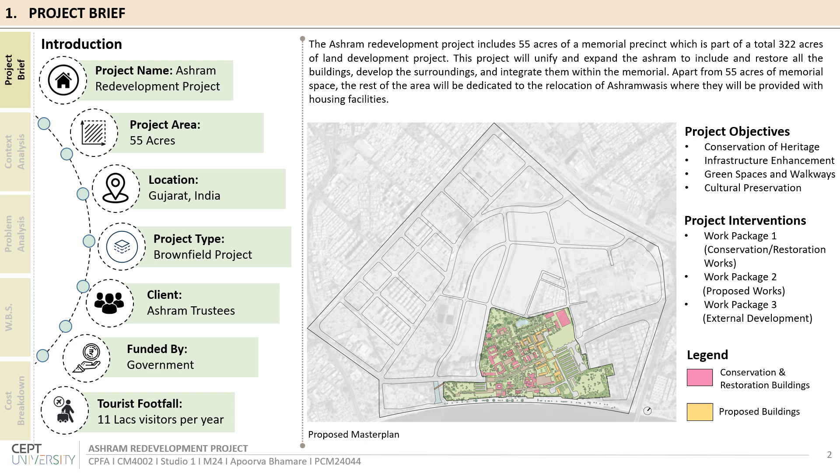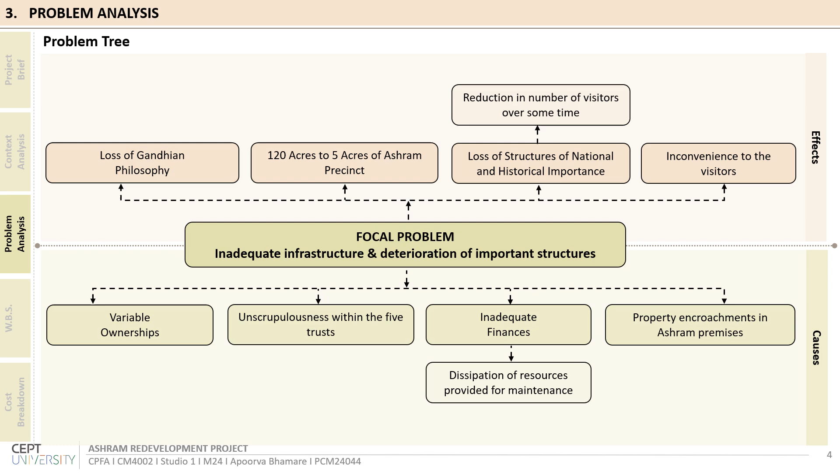Option analysis was done that included providing 4 options for the project. The first option was to keep the structures as they existed and include unidentified structures. The second option was to only conserve and restore the existing structures along with the unidentified buildings. The third option was to conserve, restore and amalgamate new buildings into the campus with the incorporation of new technological tools, campaigns and exhibits and the development of adjacent areas. The last option was to only enhance the surrounding infrastructure.

The third option was chosen for the project considering its need to accommodate new facilities in such a way that it shall not tamper with the existing buildings. It should amalgamate benefits such as the use of technology, campaigns and exhibitions which would add value to its design. Surrounding area development would also attract and accommodate more visitors to the campus.

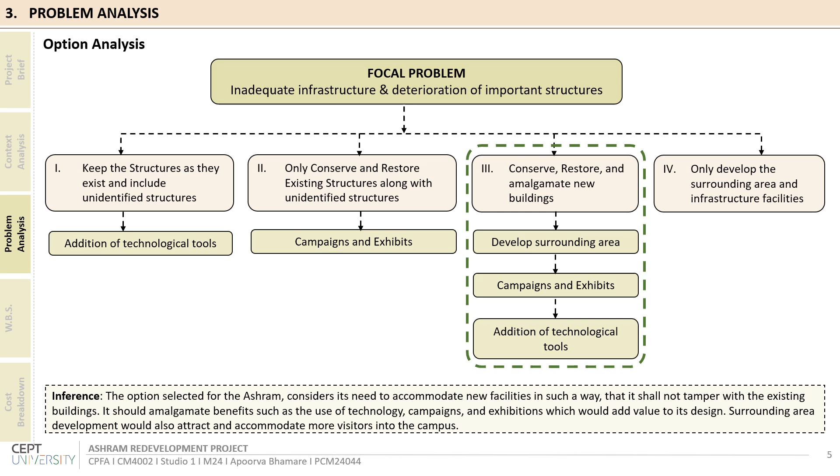A work breakdown structure was prepared considering the scope of work involved in the project, covering various stages of the project life cycle. These include the initiation phase, planning phase, design phase, procurement phase, construction phase, and operation and maintenance phase. The initiation phase includes the appointment of a project management consultant by the client. The planning phase involves a feasibility study, site investigations, documentation, and most importantly, project clearances.

The design phase will include the preparation of a master plan and concept design, tender preparations, landscape design, and appointment of a structural consultant, MEPF consultant, and exhibition curators. In the procurement phase, two contractors should be procured, namely a conservation and a restoration contractor having relevant and specialized experience and a principal civil contractor for the construction of new buildings along with external development works.

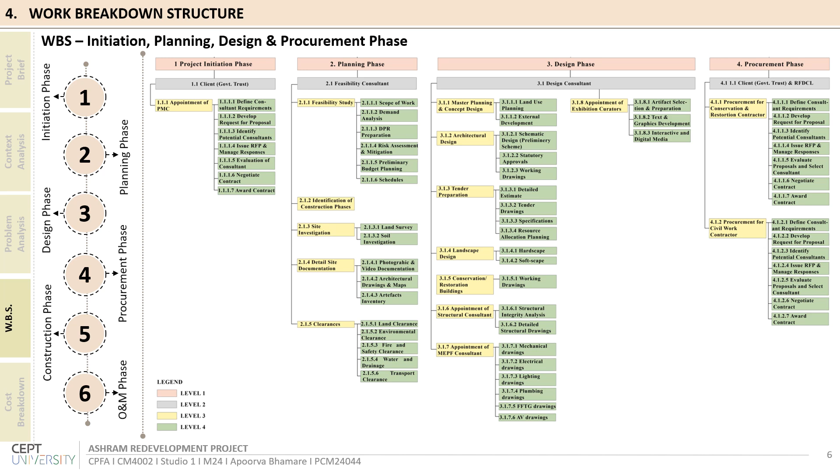The construction phase is broadly divided into three work packages. Work package 1 will comprise of restoration and conservation of existing buildings. Work package 2 will comprise of construction of new buildings such as an auditorium, exhibition center, cafeteria, etc. Work package 3 consists of external development works such as landscape work, construction of a compound wall, and infrastructure services. Lastly, in the operation and maintenance phase, an O&M agency would be appointed for the maintenance of existing buildings, landscape grounds, plants and machinery, etc.

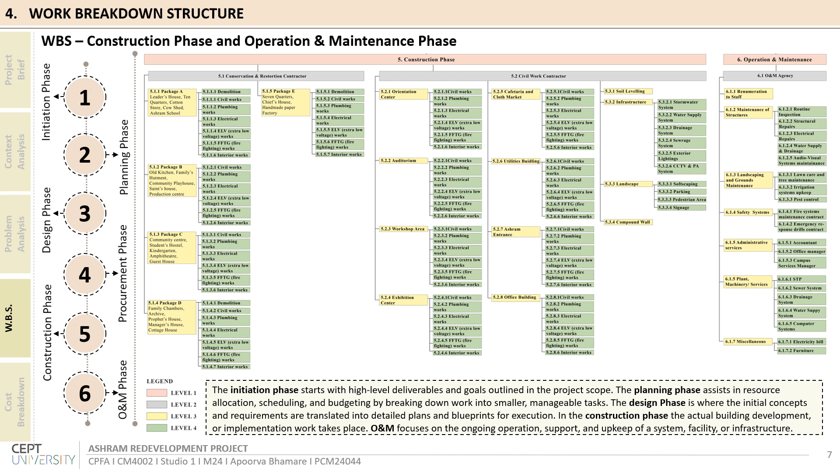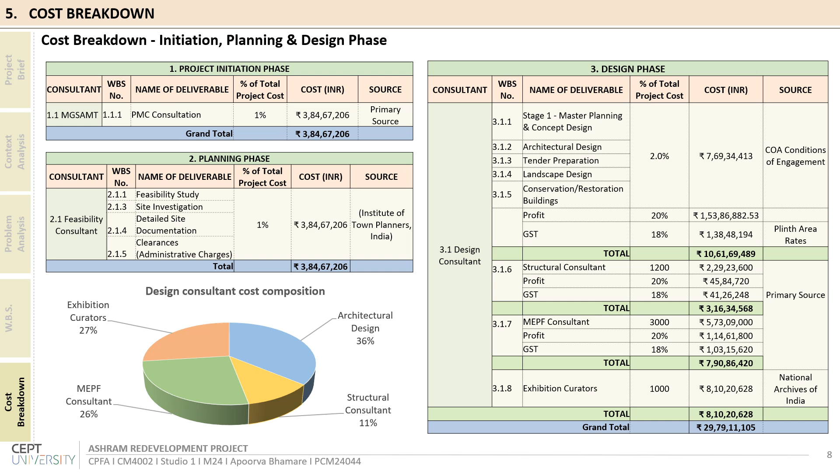A cost breakdown analysis is carried out for various project phases. In the initiation and planning phase, 1% of the total project cost would be allocated for different deliverables as shown. Around 3.8 crores would be needed in both these phases. The design phase contains consulting charges for 4 design agencies. Overall costs required would be around 30 crores. The highest costs incurred would be for the master planning or architectural consultant in the design phase.

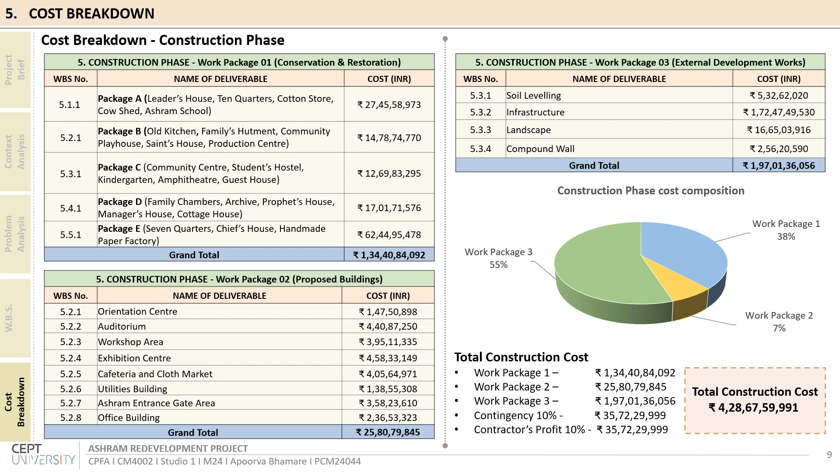The construction phase will consist of 3 work packages. The conservation and restoration works incur costs of about 134 crores, the new buildings of about 25 crores, and the external development with the highest cost of 197 crores. From the analysis, we infer that the total capital cost of the project is derived to be around 466 crores. The maximum costs are incurred in the construction phase of the project life cycle, out of which higher amounts would be required for package 3, that is for external development works. Further, O&M phase would cost around 5.6 crores with higher amounts needed for the staff salaries.

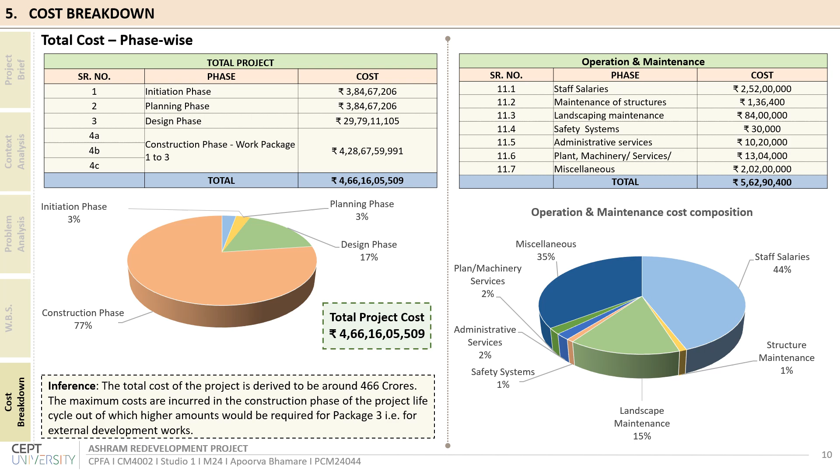To sum it all up, the major conclusions drawn are as follows. In context analysis, the most influential factors are the political and economic factors. The focal problem is identified to be a lack of infrastructure facilities and deterioration of existing structures. The option chosen for the project is to conserve, restore, and incorporate new buildings with enhancing technological facilities and external development. Work breakdown noticeably involves the segregation of the construction phase into 3 work packages: conservation and restoration works, new building works, and external development works. Finally, cost breakdown concludes that maximum costs would be incurred for the construction phase, especially for the external development works.